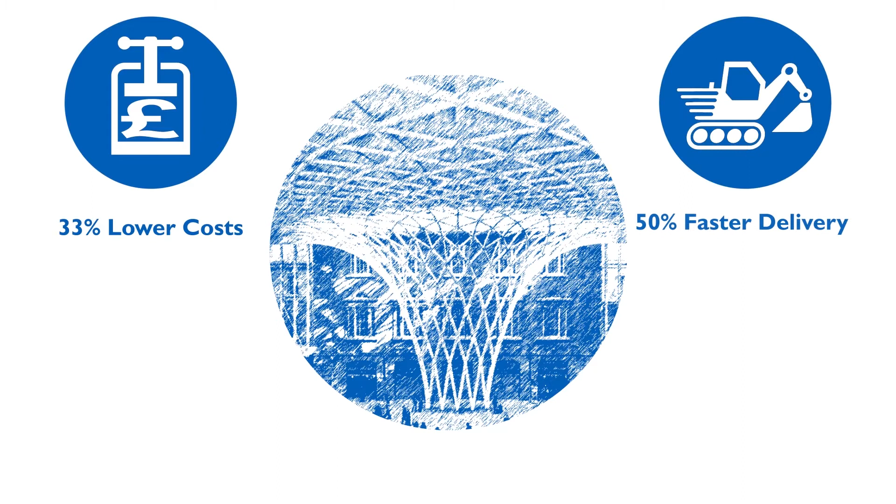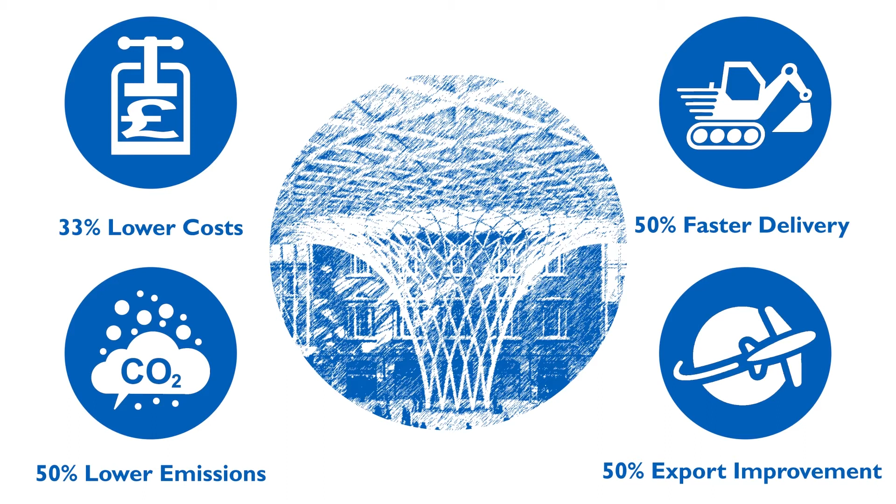When it comes to the benefits of BIM, the UK government for the Construction 2025 targets looked at four headline figures: 33% lower cost, 50% faster delivery, 50% lower emissions, and 50% improvements in exports. And on the face of it, those numbers seem really high and really ambitious. But when you start looking into the impact of BIM on each of these numbers, there is a significant impact that we can make through better processes, better technology to reduce waste.

In terms of the cost, 33% lower cost. So much of our process for designing and delivering buildings has incredible waste. Materials coming to site and never getting used, variations in the design process, siloed working. So when you start looking at that number of savings around BIM, the 33% is probably one of the most realistic targets on the Construction 2025 targets.

Faster delivery has always been a challenge. It's been something that the industry has said we can't do because every site is individual and it's tricky to make things faster. But when you start looking at what's happening elsewhere with pre-manufacture, things being built off-site, things being coordinated off-site and brought together and put together, 50% starts looking more achievable.

In terms of lower emissions, the embedded carbon in our buildings is significantly higher than it needs to be, and a lot of that is procedural. By not designing in the most sustainable solution from the earliest stage, and then not being able to change that later on because we've come too far down the line to choose the right materials, the right processes to build that building with a lower emission, we're not doing ourselves any favours in the way we build things.

So if we do involve our manufacturers earlier, we can take advantage of all the R&D and innovation that they're doing to get the best products for the site and really make the project sing in terms of lower emissions. But for me, the 50% target, I think that one's too ambitious personally.

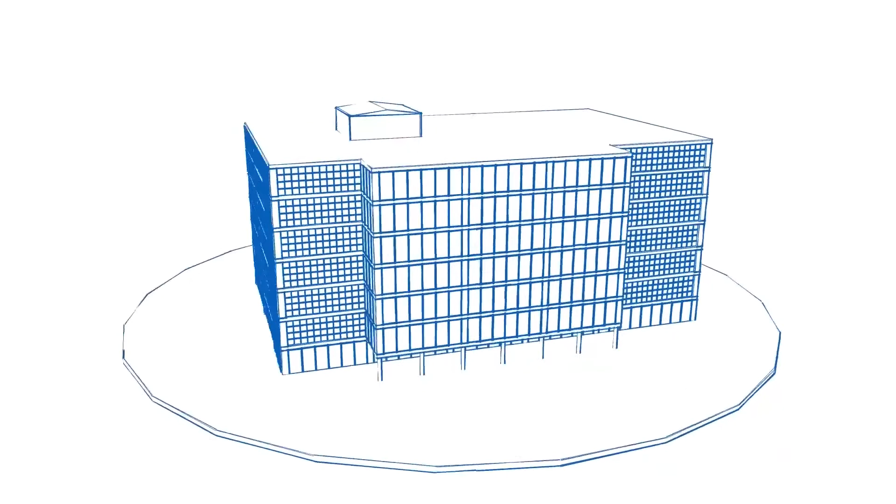In terms of what BIM actually means, the acronym is Building Information Modelling, but it does get confused with BIM Level 2, which is the UK initiative. And probably the best definition of BIM that I tend to use comes from the NBS, which is the means by which everyone can understand a building through the use of a digital model. That model might not be 3D, it might be a data model, but this is the concept of BIM, making sure everybody understands the building through the use of a digital model.

Level 2 BIM was the government's initiative to cement BIM as the standard for delivering projects by 2016. That slipped a little, but what is Level 2 BIM? Well, Level 2 is about bringing the people, the processes and the standards together so we have a consistent way of using BIM on UK construction projects.

The Level 2 org website, which is the place where all of the standards live, and there's a lot of good advice in there, describes Level 2 in quite a good way by saying the adoption of BIM Level 2 by the construction and asset management industry requires organisations and individuals to embrace change and accept that traditional roles within the supply chain and client organisations may need to be redefined to successfully implement the new processes and information management requirements.

That's something that takes a little bit of time to absorb, but what they're trying to get across is this is about an industry journey of industry change, and throughout that change there are going to be new roles emerging, but it doesn't mean that we're going to start losing professions. We all heard in 2010-11 that BIM was going to be the death of the quantity surveyor. Of course it's not, but it does mean that quantity surveyors have to change the way they work from a 2D way to a 3D way and a data-rich way of managing their approach to the industry. In terms of that journey, the idea was that we framed the industry in terms of 3 levels.

Level 0 was the industry that I joined, where drawing boards, a little bit of CAD, very much siloed working, we'd draw it all up and we'd deliver it, and then somebody would build it. Level 1 is there to formalise things in terms of working together. Level 1 isn't the default for the industry. It's assumed that it is because we all share things over the internet every now and again, and we all use CAD. That's not true. A lot of people are still at level 0, and they need to go through that process of bringing their standard procedures up to level 1 before addressing level 2.

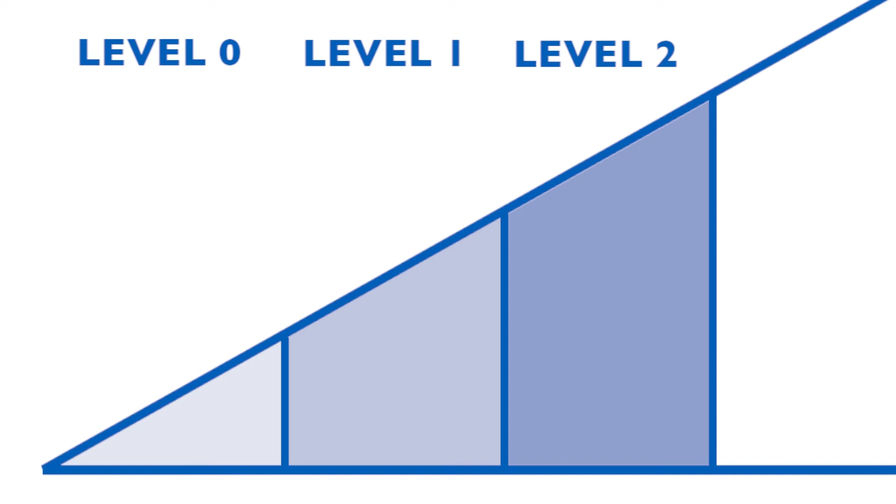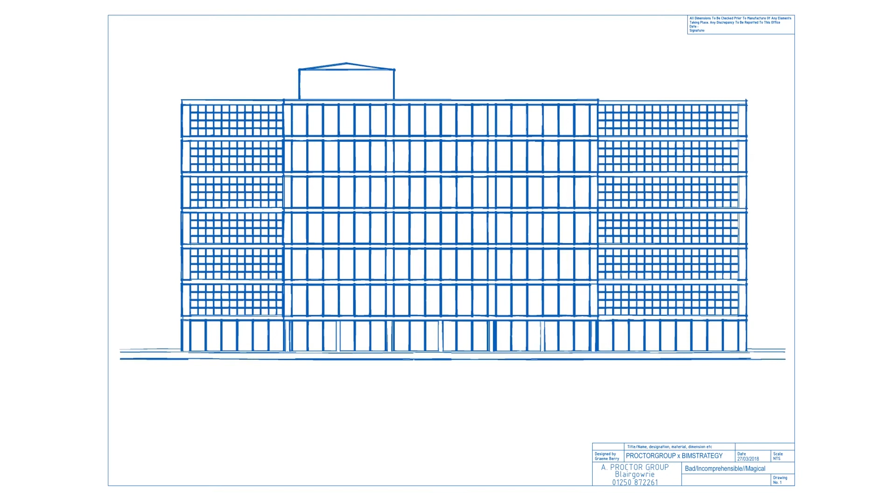Level 2 is relatively well defined. What level 2 really is about is a collaborative approach to delivering a digital model, whether that's 3D or 2D or a mix of both, that is useful throughout the project and improves the handover afterwards. As much as that can sound a little complicated, there's only 3 deliverables that have to be there for it to be a level 2 project. You must still hand over the 2D PDFs. That doesn't change yet. If there are models on the project, you have to hand them over to the client. That is part of the level 2 process.

You've created that rich data source. And COBie data is the key handover format for level 2 BIM in the UK. So it's a lot of the same information that we've always collected, but we're bringing it into one place and linking it together. It's sometimes displayed as a very colourful spreadsheet, but it's well defined, it has a British standard behind it, and it's about the construction industry taking our first steps into delivering good data.

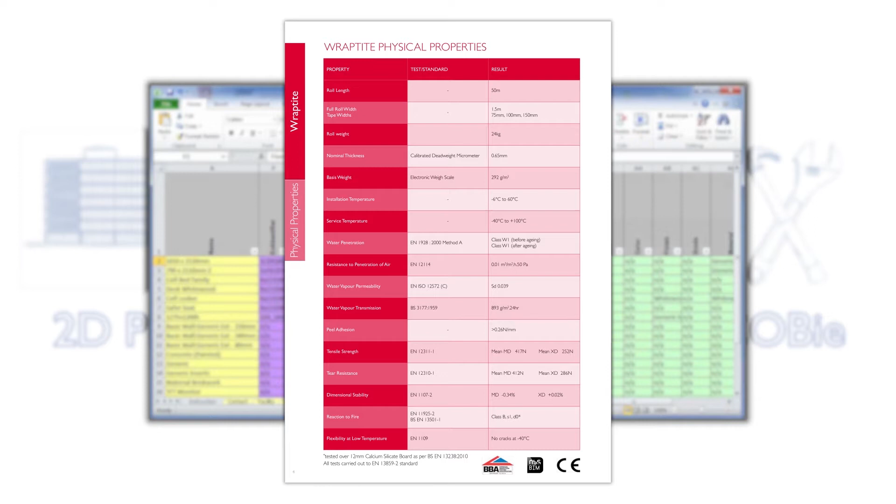And that data doesn't come from the architect in all cases, it doesn't come from the engineers or even the contractor. A lot of the data that matters for operating the building that we capture during construction comes from the product manufacturers. And it's not new data, it's data that you know about your products. The thing that's missing is the structure. So we need to get our products into a format that we can absorb into the project processes so we can deliver the structured data in COBie format.

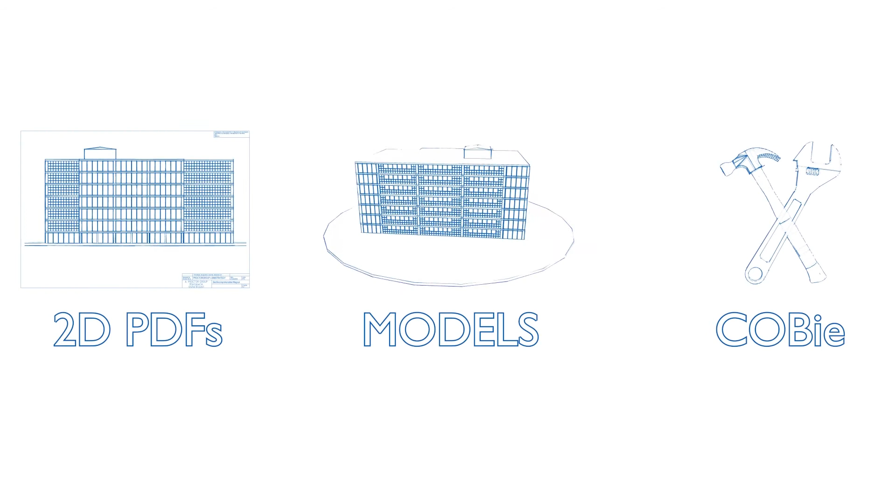And as much as there's only 3 deliverables, there are some key things that have to happen throughout the project for it to be a level 2 process. There must be a defined information requirement. If we don't know what information our clients want, we can scrap around in the dark trying to find it and hand over something, but that's not level 2. We have to understand what the clients need.

And then you set out collaborative working processes, which we can all agree to do BIM together, shake hands, and it's all nicey-nicey, and then it will probably fail when the project goes through any change. That's why the BIM execution plan comes into play. So we have a requirement, we have a response, and we have a contractual obligation to deploy our plan to deliver those requirements.

One of the key things that level 2 sets out is that we don't just gather all of our data and when we hand over the building, hand over that data at the end and say, surprise, there's the data that you asked for, we think it's right. We go through a process of data exchange and validation. So at key points in the contract, we hand over the data that is available at that point that answers the questions that the client needs to answer at that point.

But that process of exchanging information, handing over a data set, is not something we're very used to. And a lot of that data, the further you go into the project, the more manufacturer data goes in there. So it's a process that everybody has to learn how to do. And because we're handling more data than we've ever handled before, and we're structuring it in a way where it can be easily read and interpreted, we have to be security minded. We can't create all this data on behalf of our clients and leave it on USB sticks on trains. We have to be careful with that project data.

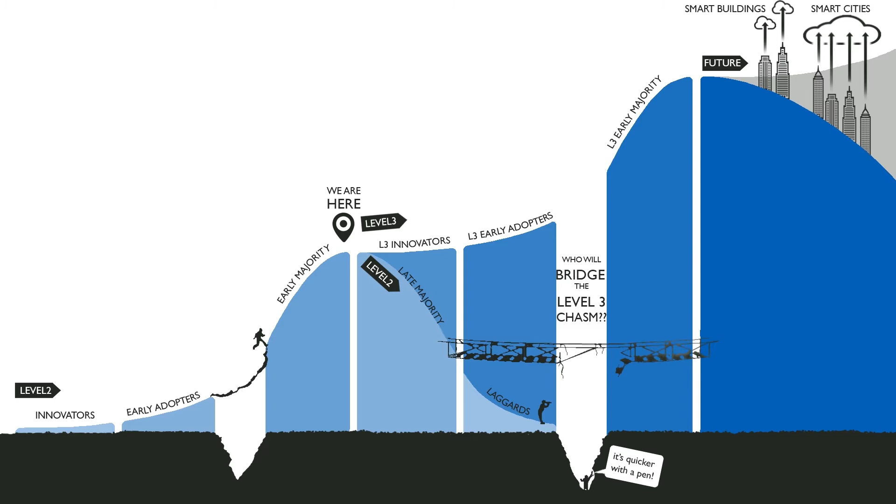After I drew this, the UK BIM Alliance set the target of BIM as business as usual by 2020. For me, that's where the bridge comes into the diagram. If you're not on that bridge by 2020, you may find it difficult to adopt and might struggle to win some contracts afterwards.

Getting product manufacturer data and objects and knowledge into the design model is critical for success going forward. But what we can't do is continually expand the design team and put everybody in at that early stage and have enormous meetings with every potential manufacturer at the table. So we need the knowledge into the project, but not necessarily all of the people. And BIM gives us a mechanism for that. And this is where BIM objects and BIM data do come in very, very useful.

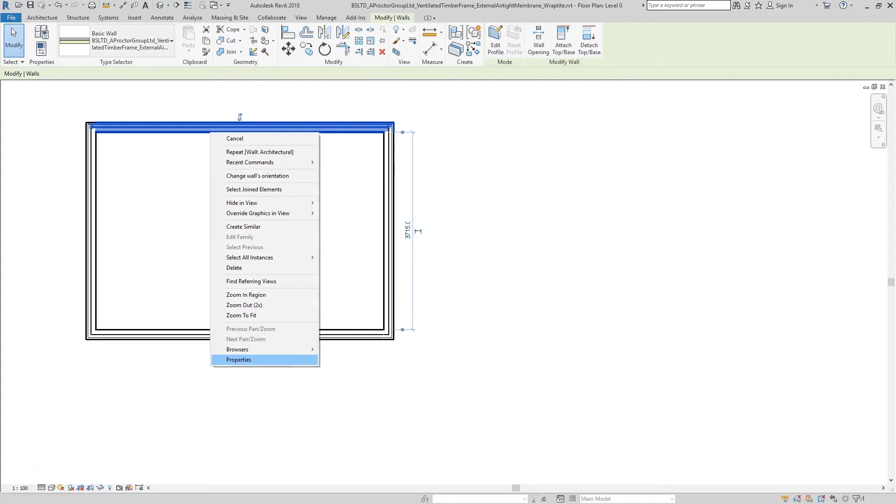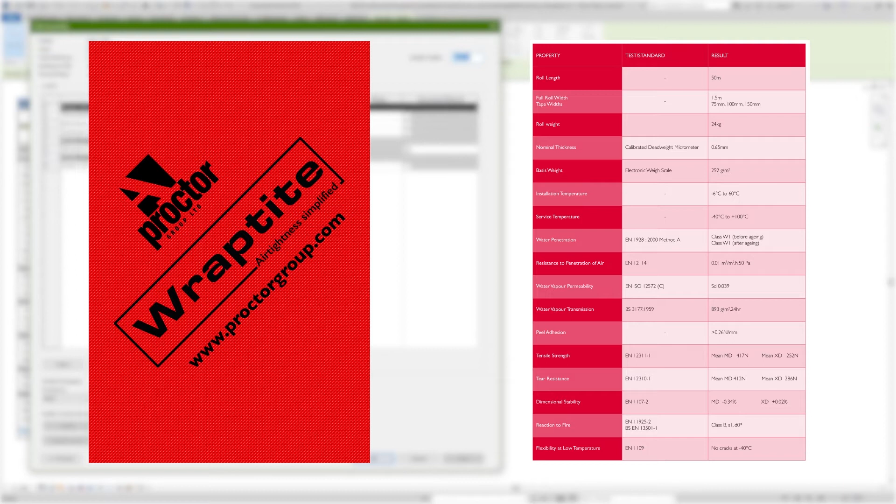We have a number of ways of getting manufacturer data into the design process. In terms of a BIM project, you have two key approaches. You can download and install data-rich models of objects into the design process, and I'm not going to perpetuate the myth that getting a manufacturer's object into an early stage design model is self-specification. But what it does mean is your brand and your unique selling points are known to the design team, introduced to the contractor if they've not noticed you before, and your technical qualities, the things that make your product better than your competitors, that's known in the model.

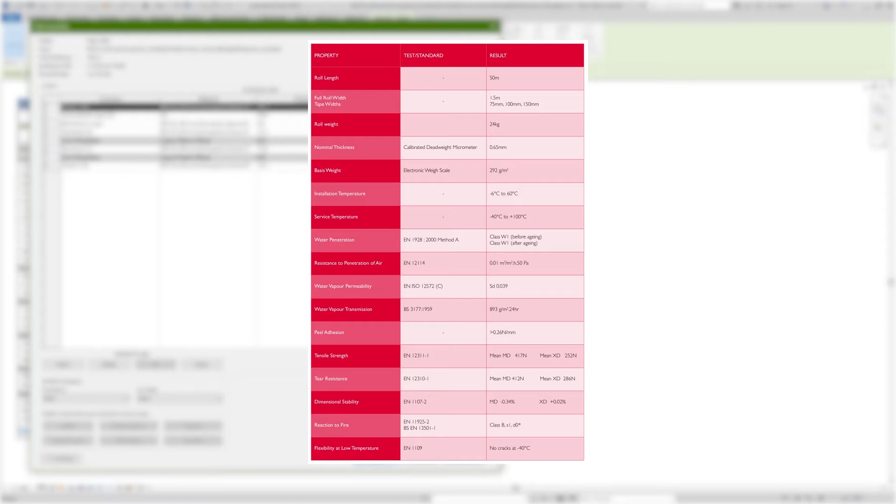But there is another alternative, which is product data. So this is allowing the design team to use generic objects, but supplement it with the data specifically about your product. So whether that's about fire doors, different fire ratings, different glass ratings, weights, those kind of things, we can start pulling that in. In terms of making the decision between modelled objects and product data with Proctor Group, my approach was to come and talk to the team here, because it's not a classic decision.

Whereas if it's something that's very spatial, like a piece of furniture, objects very much play a part in that decision. If it's something that's totally embedded and never seen, never maintained, and doesn't really have that bigger impact on the design process, then data matters more, because it's about getting the right data handed over at the end. The Proctor Group set of products really do straddle both, because as much as they're not a classic maintainable asset, the approach to using their products in the design process improves the thermal and acoustic properties of the design.

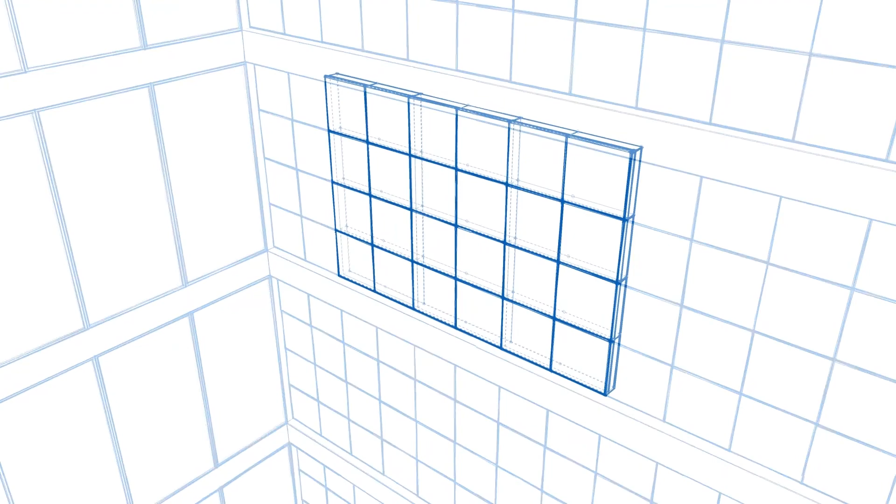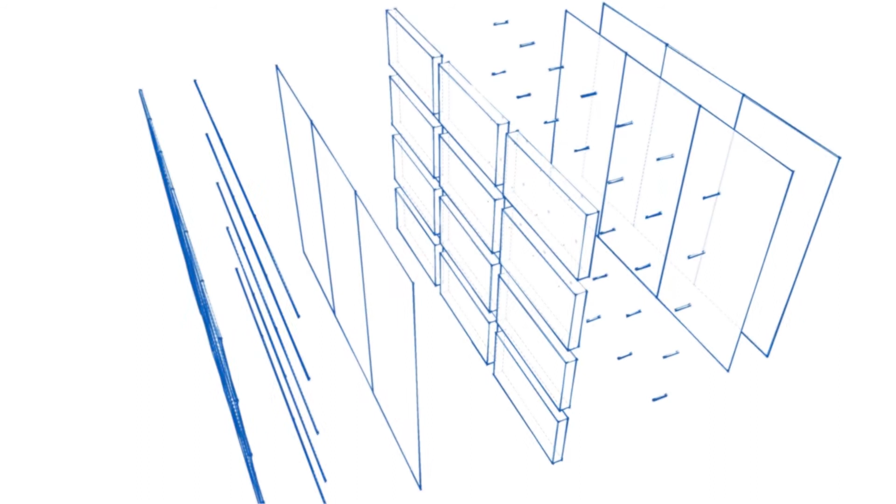And what's really interesting about their approach is that it moves layers within the built fabric to different places to achieve better results. And one of the problems we discussed when I came to see the guys at Blairgowrie was that even though it was the right solution for a project, it was hard to get onto some projects because it had been designed too fully to make that switch to where the layers were within the structure of the building. People didn't want to do that redesign because it takes time and it adds cost.

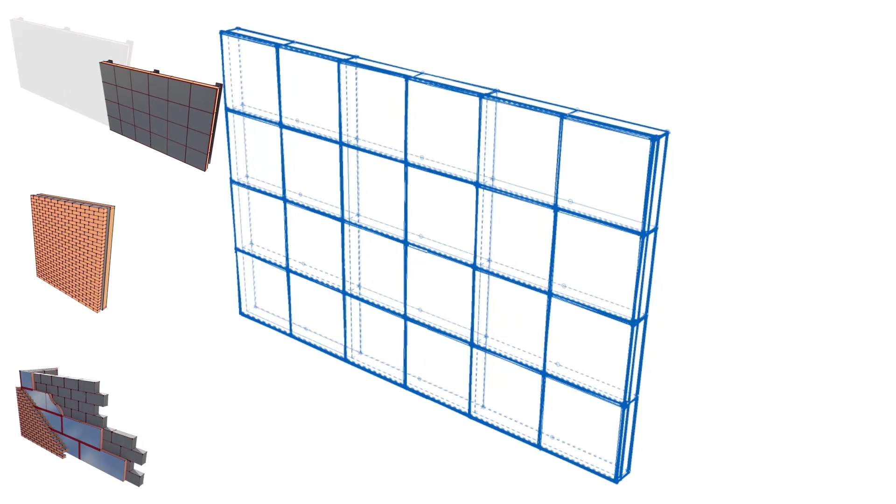So as much as it's not a classic maintainable asset like a window, it made an awful lot of sense to model the Proctor Group products to ensure that when it comes to making those design changes, we could take out a generic wall and replace it with a Proctor Group wall, which has all of that knowledge that we need in the project to make sure we get the sound right, the insulation right, the air tightness right.

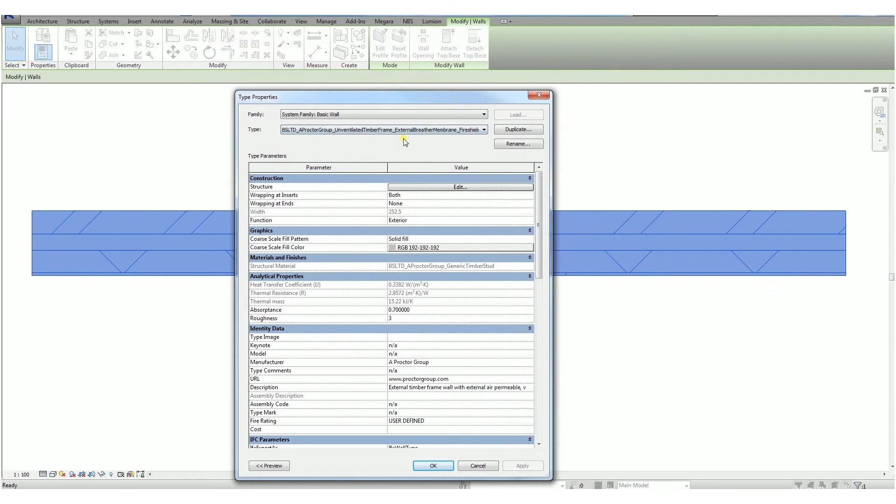It's not about how we've modelled the thickness of a membrane. It's what that membrane does for the design is why we went down the model route. So it wasn't a case of us modelling a chunk of a membrane and putting it there so people could download a piece of membrane and try and insert that into their walls. We created wall systems and floor systems to try and ensure that people were designing with the best knowledge available to use these solutions appropriately and get the right results.

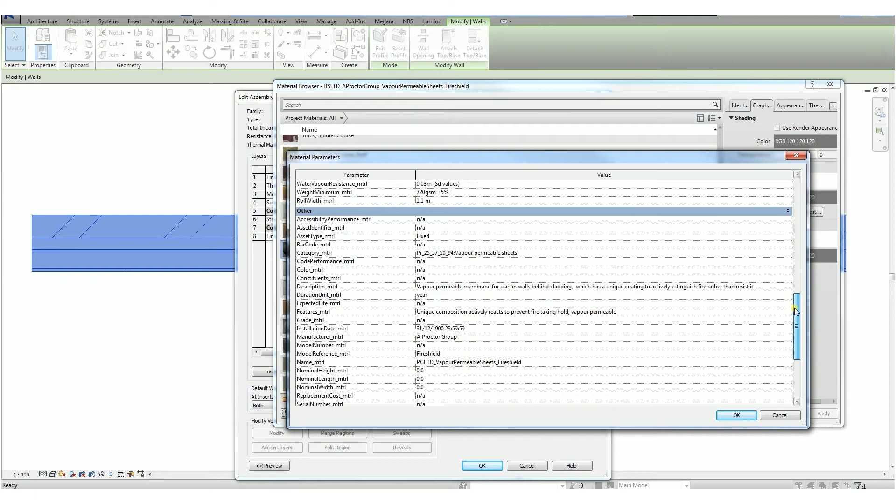It was something I hadn't thought of before, that the rework of selecting products might stop products getting selected even if they were the right product for the project. And we went away and we designed some prototypes that we thought would work, and we tested them and we got some really great results. So we decided to proceed with the project, and the set of models that we're introducing in this webinar are now available live on the website.

Now I'm going to focus a little bit on product data templates. Work on product data templates as part of the UK approach to BIM is not finished, unfortunately. That's because it's complicated. It's not something you could sit down and write. It involves an awful lot of people and an awful lot of knowledge. And there's some great people working on it. UK BIM Alliance are working on it. We've also got the standards bodies looking at it with the CEN standards from Europe and the international ISO standards

looking at it. Because aligning our information around product data and providing those templates for people to fill in a consistent way means we can start comparing products with products in a much better way. And that isn't a UK specific problem. That is a global problem. So I'm going to try and discuss the reality of the situation around product data templates without making it sound like there is a ready-built solution for you to just go and pick up and it's all going to work

perfectly well. Asset owners, architects, specifiers, contractors and facilities managers all need data about the products that go into buildings. They need different things from it at different times, so creating a template that suits all those needs is actually quite a difficult thing. So what we need in terms of manufacturers bringing information to the table, we need those data sheets, which is a filled-in product data template, to be structured.

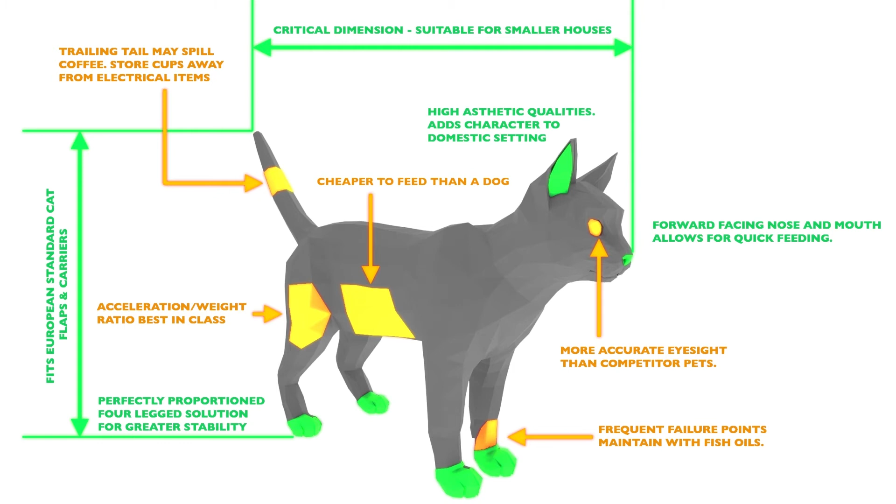We've discussed the differences between a model-based approach and a PDT approach, and in some cases you may need to do both, or you may want to do both. But it's good to review some of the key decisions you could make. So in terms of models, does the shape and size of your product impact the design process? If it does, if you're going to be bigger or smaller or taller or whatever than somebody else's in the design process, having some objects might be a useful thing packed onto the design process.

It may be that you don't need to model your details up to LOD 5, which is level of detail 5, which is a full technical model of everything within your product. You might be able to drop that back to a 3 or a 2, which just represents the shape and size and general connections of what your product does. So people can start using it in a design model.

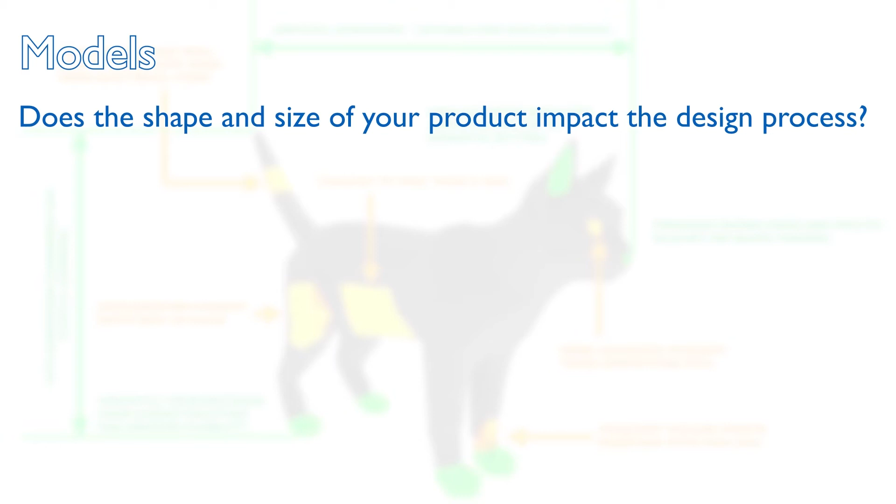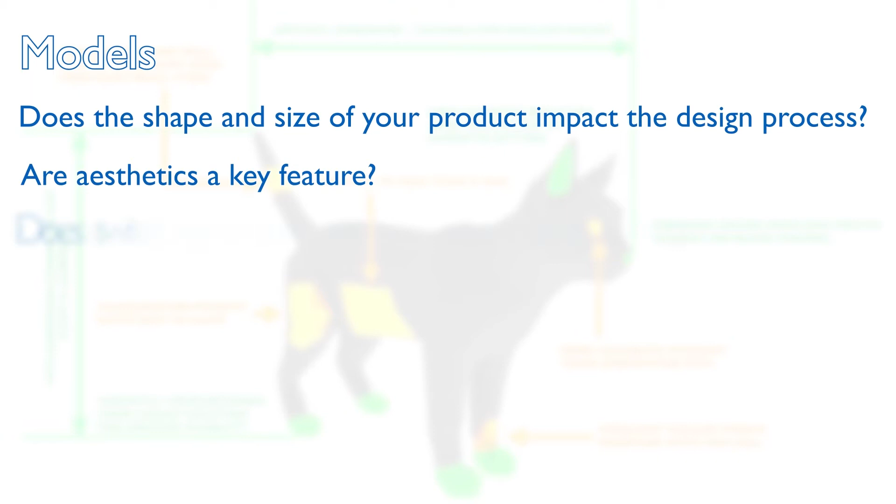Another key thing when deciding whether models are appropriate are the aesthetics. Does your product look better than your competitors? Is it going to be exposed in the finished building? Then an object, in terms of a 3D object, certainly has more weight than using a generic object with your data against it. Does switching your product into a project require design changes? If it needs to go back to the architect or the engineer for changes, they're going to appreciate it if they can get model content and do the job quickly.

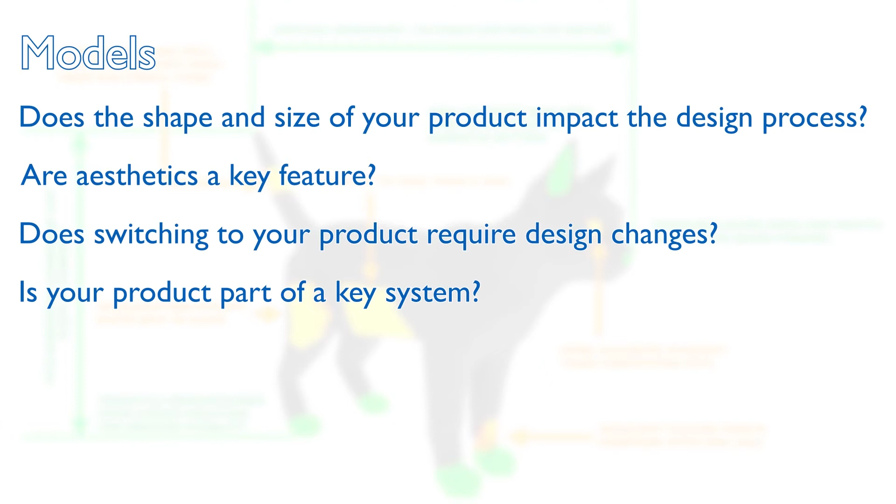Is your product part of a key system? Do other things depend on what you're doing and the size of your product? If so, objects might make sense. And one of the things that gets overlooked are people asking, do the senior management in your business know whether your technical team are taking phone calls asking for objects? And another key indicator of whether you should do it is, do your competitors have objects?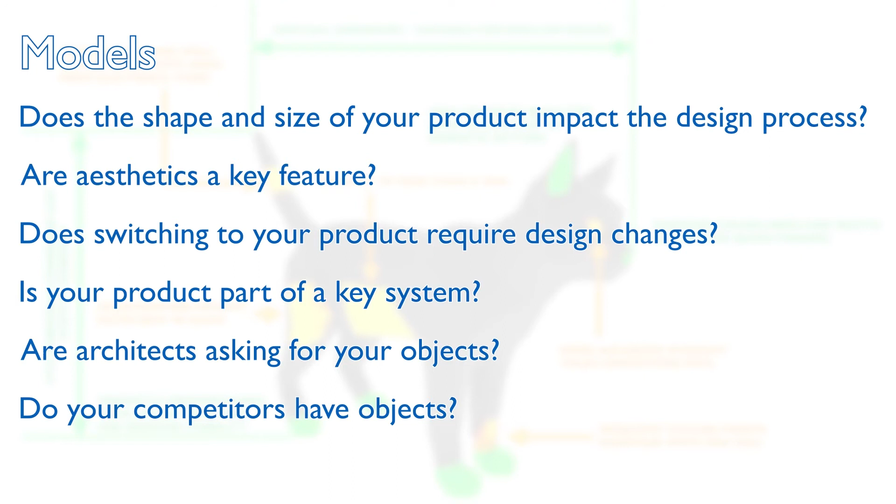If you're in a world where your competitors already have objects, people might already just be going to their website and using theirs as standard in a design process. It doesn't mean that won't get replaced with your product later. You may get swapped in and their objects have been used and you get the work. But if they've done it, they see benefit in it, it may be worth considering it. So there's some of the key considerations around whether it's worth having your objects modeled.

When it comes to product data templates, are your products a standard size with competitors? So if the object's always going to look the same, and it's always going to take up the same amount of space and have the same requirements for space around it, all of that geometric information, the data template might make perfect sense. Just provide your unique selling points in a structured way.

Are your unique selling points around better performance or improved warranties and environmental performance? If they are, you need to tell people. That information needs to get into the team as early as you can, because that is really integral information to making those decisions about whether you stay in the project or get swapped out later.

And are you having to provide data in multiple formats to different people? Well, we hear that one contractor wants it this way, another one wants it that way, and you've got no confidence that they're asking for the same stuff in the same way at any point. If you can say you work to a template, we deliver it to a standard, then the onus is on them to take the information from your standard approach and put it where they need it if they need something else. And is there an industry standard product data template, and are your competitors filling it in?

If there's an industry standard there, it doesn't take you long to put the knowledge that you already have into that template and provide it to people. If that last one's there, even if you haven't made a decision on whether you need models or whether BIM's right for you yet, if there is a standard product data template, fill it out and put it somewhere where people can get it on your website. It's a quick win. Some people will come to your website, take it away, and never have to make the phone call.